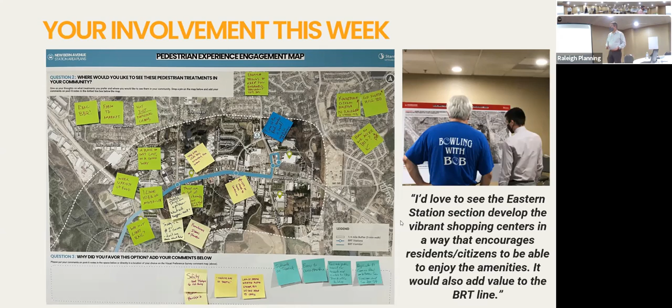One, and this was kind of one of our favorites: we've lived in this neighborhood for 16 years. Our son is 17 years old and will be heading to college soon. We sometimes talk about moving once we become empty nesters, but now I think we'll stick around a little longer and see what happens. This is exciting. And as we talk about that, it is exciting.

We take all of these comments, these ideas, these voices, and we build it into a vision. Again, you'll see an emerging vision statement, a draft vision statement. This can and will change the more information the community tells us. But there's another piece I do want to read because it's important: our neighborhoods are safe, welcoming, and walkable.

Our retail centers represent local business with a wide variety of goods and services. New multi-use paths connect us to shopping and to the rich regional network of greenways already weaving through our neighborhoods. Most importantly, our community evolves in a way that maintains affordability for existing residents, offers expanded housing choices for future residents, and prioritizes safety and security at all levels.

So we begin to bring that down into very specific goals. And these are our core goals. Number one, improved safety will guide decisions at all levels. Our streets are for people, not just cars. Aging and vacant commercial areas redevelop into mixed-use centers that offer the opportunity to park once and then walk to the variety of shops, services, entertainment, and park-like amenities.

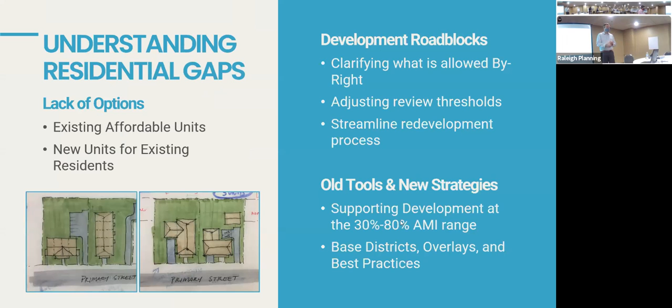At the same time, we want to support our local businesses. That's another strong message we've been hearing. And I can say for certain in this area, the local businesses, the retail, the restaurants, people have said, we want those. And that became actually a core tenet of this week, how do we kind of come up with some ideas that protect those, support them, and help them become part of the future. You'll hear about that shortly.

But we want to make sure that we have all of these in place, and really, how do we build and create support? So it's all of these different toolkits that we go through and work to have some resources to community builders, nonprofits, and the local banks. And again, the businesses and the people are often connected because they live here, their businesses are here, and we want to make sure that all of this comes and grows with this plan and this effort. So now we're talking about how do we take all of the information we're hearing, all that we're learning, and the ideas and the potential opportunities within this area.

And with this, I'd like to introduce Rhonda, who's going to talk a bit about the green spaces and others, and then getting into some of the opportunity sites that we've been looking at that you all will very likely recognize.

The green spaces. When we say green spaces, we can mean a wide variety of things. We can be in small neighborhood parks, pocket parks, large regional parks. They can be parks where you sit and read a book. They can be parks where you play soccer, football, or what have you. These can be greenways that connect you to natural resources like stream corridors. And we all know that we've always loved parks and being outdoors, but one of the really big lessons of the pandemic is we really, really love being outdoors.

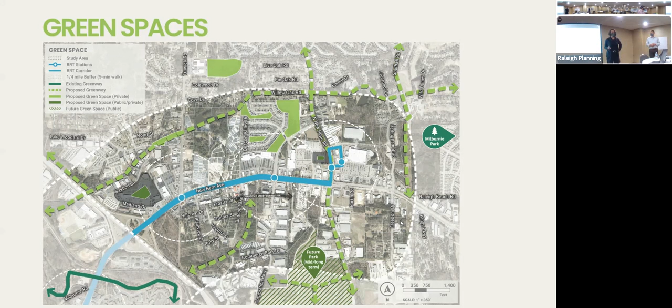So as we look at recommendations for the Eastern Stations, instead of looking for new parks—although there is potential for a future park down here as this landfill moves on to its next stage of life—what we're really looking to do is make these greenways, future and existing, more accessible by making the connections we need into the neighborhoods.

Examples of those greenways: we've got the Crabtree Creek Greenway, that was the one on the left side of the screen, and the Neuse River Trail Greenway, just off the right side of the screen, and Milburnie Park. When we talk about making those neighborhood connections to the regional scale, these are examples of linear parks—mixed use paths or shared use paths just off the side of the roadway. The idea is to make them more than just a sidewalk, to make them a little bit greener, a little bit more luxuriously recreational to use.

Putting it together, now we look at opportunity sites—patterns in the neighborhood of what we have and where we might see opportunities. We looked at this in layers. The first layer, shown here in orange, are projects that are either already in progress or have formal plans submitted to the city. These are changes you're going to see coming to the neighborhood.

Over here, this is going to be just under 200 new residential units right by the Beltline. We've got a small bit of additional retail coming in here on a previously vacant site. Many of you are probably familiar with the Amazon Fulfillment Center that's just about completed down here.

And then the Raleigh Beach Road—entirely residential development over here. There is an easement running through the middle of it, that's Duke Energy, and another new greenway is slated to go through that, according to the draft greenway plan that's up for public comment right now.

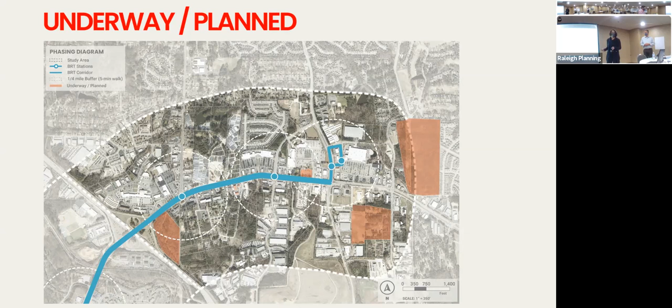So this is interesting in that we see residential approaching Hedingham right here, and we'll talk about that more later. So these are underway and planned.

Infill opportunities—the first level of infill opportunities that we're seeing is down here. This is a very low density, mostly single family residential area, pretty heavily wooded. Some of the roads in there are actually dirt. We see this as an opportunity to change the zoning so that it allows more density.

We call this an infill opportunity at the current homeowner's discretion. So if they choose to build at a higher density, or if somebody buys properties in there, multifamily will be an option. But if current homeowners are perfectly happy with where they are, their property value will likely increase as a result of that upzoning, but they are perfectly capable of staying there without any change.

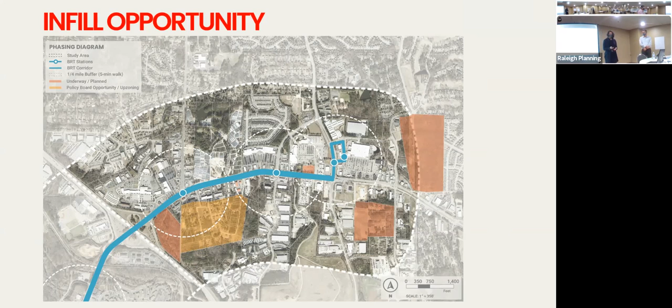Our second level of opportunities is what we're calling near term, and we don't have a specific time frame associated with this because, as always, this is fairly market driven. We have the Tower Marketplace site over here, a vacant mall, and this is interesting because we've identified three sites that represent three different scales of development.

So this is the Tower Marketplace, vacant, on the west side of the eastern station areas. Then there is Wilder's Grove, a little bit smaller, right on New Hope Road. And then this one I'm calling the Hedingham Opportunity Site.

We have a little bit more explanation on each of those. The first is Tower Marketplace—as you're all familiar with, a traditional interior-focused mall. There still is that cafeteria in the back that's functioning, but the rest of the mall is vacant.

This is the largest site that we're identifying to demonstrate one scale of development—about 14 acres. This is probably what we would call a master development opportunity, where different parcels may be sold or developed under the design guidance of a single developer, but by different entities. Because of the large size of the site, we have opportunity for a pretty varied mix of uses.

So they're all the same color, but we have some office here and here. And then we have what we would call residential mixed use—a kind of town center, a main street with amenities and a public park and plaza space in the middle. So we'd see retail and restaurants and shops along this main spine with residential condominiums and apartments above it.

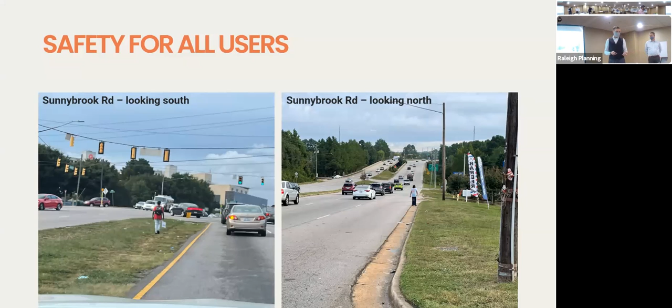Okay, so let's talk about pedestrians first, because that is the critically most important thing. Let's begin at the system level.

We're starting very broad. Some of these lines we've already spoken about - whether it's a shared use path connection, whether it's some internal streets where we can have enhanced sidewalk connections, or some of those very large, high quality intersections shown in orange, trying to get you across New Bern Avenue safely.

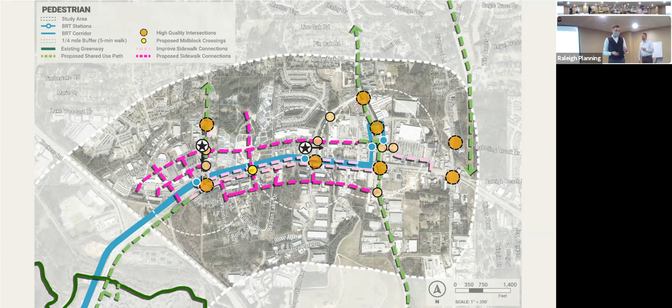We're going to show some specific examples - the two stars shown there, one of which is on Trawick and the other one is over by Beacon Plaza.

Beginning with Beacon Plaza - this is looking at Corporation Parkway, however you're in the shopping center looking out.

Right now, there is absolutely no pedestrian amenities to get you to, through, or across safely. As an anecdote, to the left of this image, there is an existing bus stop, where people are getting on and off the bus, coming into the shopping center and going back out unsafely. So this is the existing conditions.

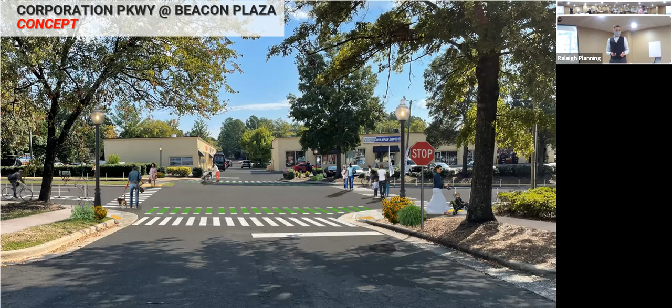What we would envision is much more multimodal. Corporation Parkway, as it stands right now, is 5 lanes wide. However, it only has the number of vehicles that will support maybe only 3 lanes, so we have 2 lanes to deal with in a road diet condition. That means we have the opportunity for separated bicycle lanes on each side, and near the intersections, a pedestrian refuge island to safely get you across this once very wide roadway, but now right-sized for its current condition, speed, and use.

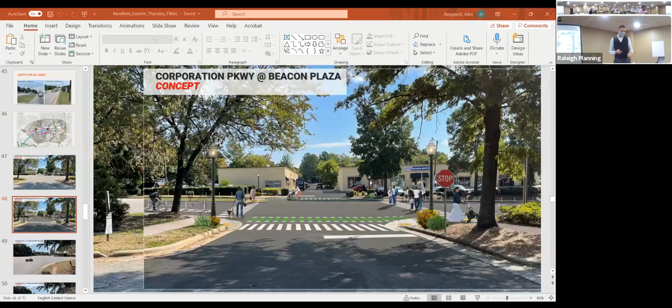That's the concept. Moving on a little further west to Trawick at Tower Marketplace. The existing conditions showcase that right now this corridor is being used by pedestrians. This worn path extends more than a quarter mile to the north, maybe even further, because people are walking to the shopping center and back home again.

Again, there is currently no pedestrian amenities to get you across this driveway or across Trawick. As you can see in the very foreground, New Bern Avenue runs east-west further on down the slope. So right now, the conditions for pedestrians are unsafe and just sort of lacking.

What we would hope for as a concept is to extend the sidewalk further north, to have an additional sidewalk into the shopping center, because that's what we're trying to connect to, but much more pedestrian friendly to get you across the driveway. And as you're crossing Trawick, one of the most dangerous roadways in our corridor, a pedestrian refuge island, so you only have to cross one segment, wait, and then cross the other segment.

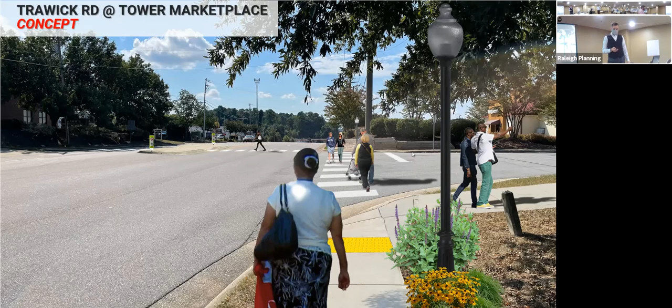So strategies and concepts moving forward from a pedestrian perspective, those are just 2 examples.

Now, shifting to roadways in the vehicle mode in particular, we just want to stop and acknowledge that not all streets are the same. There's many varieties. So when we show an example, sometimes it's one of the boulevards or major corridors, and sometimes it's more of a neighborhood street or a complete street. There's a lot of different flavor to go with, whether there's higher speeds or higher volumes, and a lot of potential opportunities in between these different varieties of roads and streets.

Now, the first example we have for you is that intersection of Trawick and New Bern. We just showed it kind of down the slope in the last photo. Right now, currently, there are 3 pedestrian crossings. So depending on which way you're coming, you might need to cross the intersection in the south and then cross New Bern Avenue to the north, and then come back to the west side again. So essentially you're crossing 3 different segments to only cross the roadway 1 time.

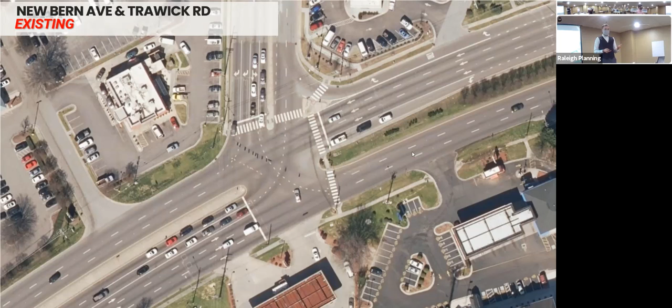So this is the existing conditions. There is a pedestrian refuge island in the middle where you can stop and wait. We consider this adequate pedestrian improvements, but there's a lot more that can be done to make this much safer for pedestrians and make sure we're not causing any excessive delay for the vehicle mode.

So number 1, there's a lot going on in this graphic, but we can add that additional leg on the western side. So if you are coming from the west, you don't have to cross 3 segments, you only have to cross 1. There's an additional pedestrian refuge island on the western side where you can stop and wait before proceeding on.

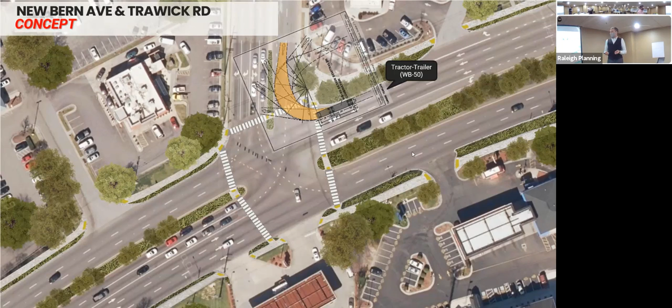And more importantly, the free-flowing right turn lane that exists right now, which essentially allows trucks and delivery vehicles to speed up as they go around this curve, is something we want to fill in. We want to make sure that the curb is still adequate for large turning vehicles, so we put on a tractor trailer vehicle and show that it can still make that turn from the middle of one of the existing travel lanes and make that turn before heading north onto Trawick, without conflicting with the new pedestrian refuge island to the north as well.

So we're drawing in the curve to make it easier for pedestrians, making a shorter distance to cross, while still allowing that turning vehicle and the largest vehicle in this corridor necessary. Just highlighting some of the additional amenities there as well. There would also be the ADA curb ramps for pedestrians at each corner, the pedestrian refuge islands on both sides, and high visibility crosswalks. And with this added landscape, possibly some shade trees as well.

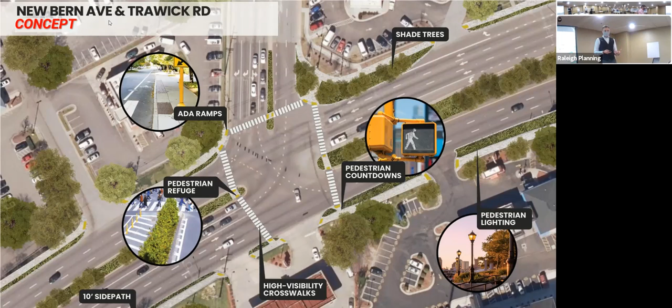Okay, so one more concept design there. Further on down the corridor on New Bern Avenue, there's the potential for a mid-block crossing option between the signalized intersections. There are a variety of mid-block crossing treatments, and there are engineering protocols to decide what's the most appropriate option to choose from. I've only highlighted two here.

The top image is what's called a Danish crossing, where you cross half, turn your body physically towards traffic, and wait until it's safe to then cross the other half. It's much like a pedestrian refuge island, just split in the middle to give you time and pause to wait. The bottom is actually a rectangular rapid flashing beacon, where when you activate these and the lights go back and forth, vehicles are supposed to stop at a non-signalized intersection at a mid-block crossing location. So there's at least two options for a mid-block crossing along New Bern Avenue and other roadways in this section of the corridor. But these are just two we wanted to present as potential opportunities.

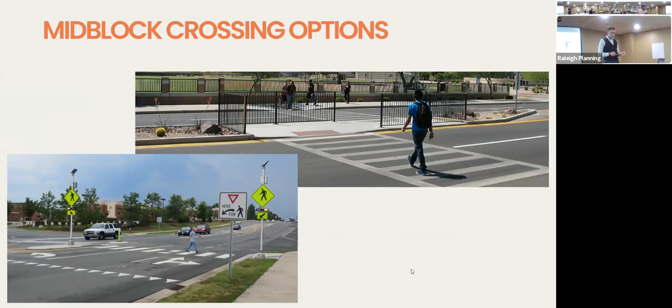Now, shifting to the bicycle amenities, because we are walking and biking more since the pandemic. There are a lot of planned bicycle connections to be made, some of which would also be for pedestrians, to connect you to those regional greenway systems, where they would be enhanced side paths along the side of a road, because we have those opportunities since there's adequate right-of-way. So the major green lines are those important or more significant bicycle connections. Some of the blue bike lanes, or separated bicycle lanes, are some of the bike-specific, traditional amenities that aren't really for pedestrians. And then of course, crossing at those high-quality intersections.

Just like pedestrians, bicyclists need those safe places to cross at New Bern Avenue. We want to show you one example along New Hope Road up here to the north, and remind you that this was one of those development sites that Rhonda talked about near the BRT station a little further south. So this would feed right into it in the near future.

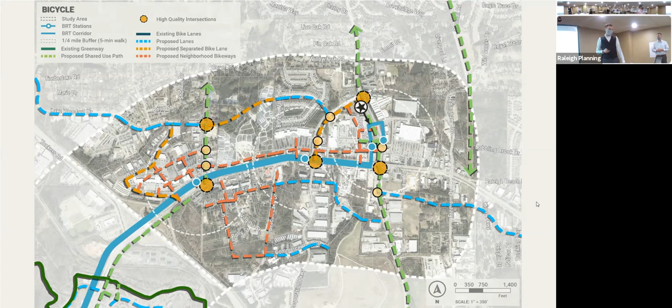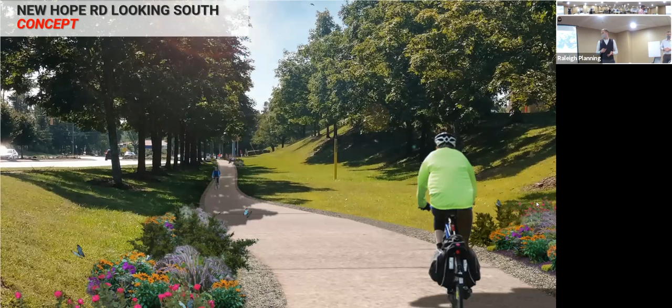So this is what the right-of-way looks like right now. It's just off New Hope Road. Right now, a portion of it is being used for storm drainage and runoff, but we can still utilize this area already. So maybe it'd be a curvilinear side path. It's much more of a bicycle and pedestrian amenity focused, but leads you from the north down south towards the BRT station, and hopefully into that development site in the near-term future. So you have a nice separated and safe connection to get onto that regional connection to regional greenways.

So one concept there. Much further west, we want to talk about the challenge of getting over and around the 440 Beltline ramps. We've come up with the most logical and shortest opportunity: to utilize a portion of the outside lane of travel, making sure we can get around existing ramps and maybe redesign some of their geometry to make them safer for pedestrians, while not disrupting the vehicular flow as well.

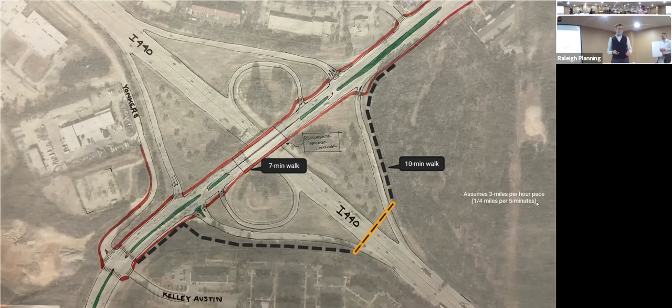Just want to highlight that there's a second alternative that we explored as well. It is to take you away from New Bern Avenue, across and over on a bridge, much like the one over at Wade Avenue, and then bring you back. This alternative would be much more expensive, and would add at least 3 minutes to your walk time from point to point. So this is an example of what that would look like on the south side of New Bern Avenue.

Right now, there's 4 lanes plus a shoulder, 54 feet of pavement. However, if we can make sure the free-flowing ramps align properly and still get traffic flow, I'm hoping we can utilize one of those lanes for a 2-way separated bicycle and pedestrian lane. One example would have flex post bollards as separation and then pedestrian scale lighting. The other would be much more of a traditional safety enhancement using concrete barriers. Higher level of safety, and perhaps there's an opportunity to use public art on the inside, making them a bit more fun and entertaining to actually use this corridor. So concepts A and B.

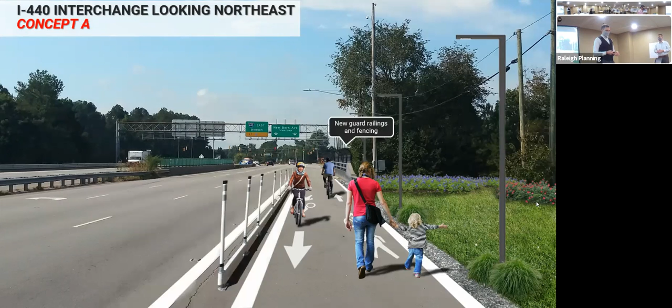Rhonda did a wonderful job showcasing some of those development sites and potential opportunities. We want to recognize that land use and transportation are directly related. Remembering back to the phasing in the near term, midterm, and long term, all those development sites are shown here. We want to make sure that regardless of when that phasing happens, they still meet some of those mobility opportunities.

We're layering them all together in the near, mid, and long term, so that not only are people redeveloping these sites and moving to this area, but capitalizing on the mobility resources here and connecting to potential future greenways to the north, over the Neuse River Greenway, or along New Hope Road with the side path concept we showed. So stitching it all together, laying it on top of one another, making sure the system and these strategies will work for you.

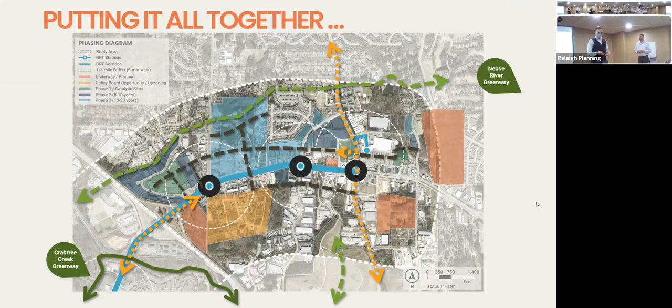Thank you, Timothy. We've just shown you all of these ideas, potential opportunities, a vision that is growing and will continue to grow as we work through this. The next question is, what does this mean? What is the plan actually going to be, and what's going to be in it? What will the city be doing to help make this change happen?

The plan itself becomes the mechanism, and it will make recommendations so we can get the right tools and policy in place. So right now, these are the steps. This is how we set the stage and can move forward into implementation.

It's a land use and zoning amendment. This means increasing the density, increasing the heights, creating systems that favor and encourage affordable housing. Significant redevelopment is anticipated in selected nodes along the corridor, and we're identifying the best places where that can really work and be transformative and supportive, places to go to. It's looking at this nodal, smaller area development concept.

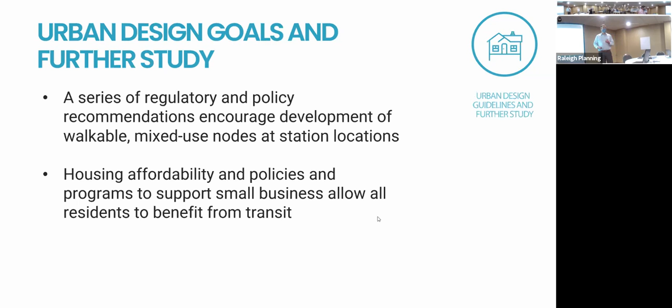So what are the next steps as we wrap up the end of this presentation? We've got October 4th to the 8th, the New Bern Eastern Station workshops. We were just wrapping those up right now.

We're doing a bike and pedestrian safety summit. That will be on October 15th. And then in the winter of 2022, we are pulling this plan together. The drafts will be emerging, and you'll be able to see it.

At every step of the way, we look for, we encourage, and we really want to bring the community's comments and input into this. Because again, you're here, this is your area, your vision, and your plan, and we need to make sure that as this area changes, the community is at the table and participating in that change and helping it make the change that we all are looking for.

So with that, let me just put a final plug. If you Google Raleigh New Bern Area Plan, station area plan, you'll find it, or go to Raleigh's government website and you can easily find it from there. So please come, all this information will be online. There's multiple ways to provide us input and comments through the website. And again, we really encourage that. The more that we hear from you, the more the vision is coming from your voices.

I'm about to open up for questions, and what I will say to our new guests who have arrived, after the questions, I'm going to give you a personalized speed version of this presentation so you can see exactly what we just went through.

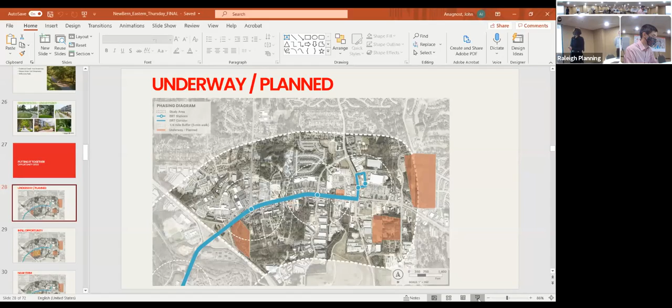Thanks. So for folks that just arrived or for folks that just joined online, I'm Rhonda. And as part of our look at the community and what's here, what may be needed in the future, and what might evolve in the future, we did identify 3 of what we'll call opportunity sites.

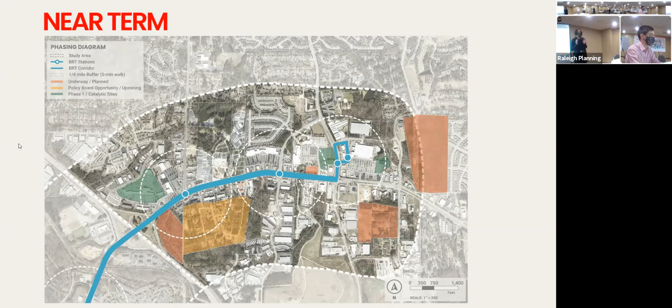Big view on this map, we've got the Tower Marketplace over here on the west end of the alignment, and then Wilder's Grove, also another mall site that's underutilized right now, and then what we're calling the Pettingham site here right next to the Walmart. We're really excited because the interesting thing about these 3 sites is that they kind of showcase a large, medium, and small version of redevelopment.

Starting with the large one, that would be the Tower Marketplace over there near the Beltline, and this is about a 14-acre site. So this site gives us the most opportunity to get a lot of different land uses in there. We're talking about a mix of a little bit of office, some retail, and then probably both for rent and for ownership residential, with a variety in that residential as well.

So we're thinking we've got office on both ends of the development, and we've got a central spine, sort of a pedestrian promenade, going through the center of the development with public open space and plaza, likely all those outdoor restaurants that we've really grown to love during the pandemic. And then residential, lease and condos and apartments above that retail, those shops and restaurants in the center of the development. And then back here, townhouses and smaller ownership products, so that we're offering a variety, both probably studio, 1-bedroom, 2-bedroom, and then a more vertically stacked use.

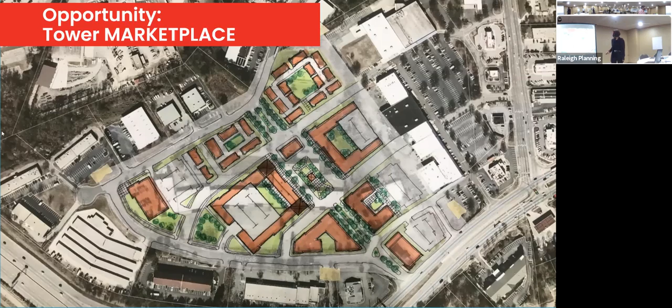And this is just some examples of what that town center, when I said we've got that central pedestrian spine with some amenities in the outdoor restaurants and shops, these are just some examples of what that might look like.

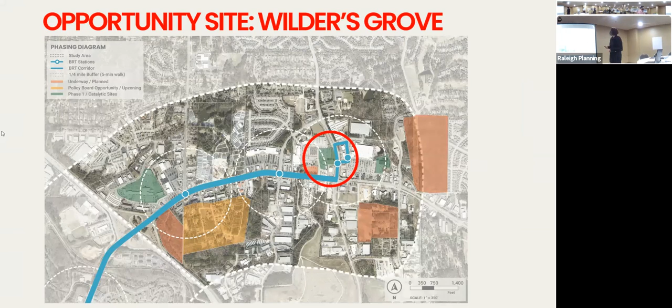Moving on to our medium site, this is the Wilders Grove Shopping Center. Those of you who are familiar with us, there is a grocery store here now. You might go here to buy your new furniture, sofas, couches, what have you. Or if your license expired, you might take advantage of the DMV up here.

So this is a smaller site, but we're really excited about it because it's sitting right on the last of the BRT stations. The BRT will come down New Bern Avenue, turn up on New Hope Road, loop around the median development by the Walmart, and then head back to downtown Raleigh - this will be the station. So this is a site where we really want to take advantage of the density bonuses available in the TOD overlay district.

That means we can go a little higher than we normally could as long as we include affordable housing. This is really exciting because we can get more people living right on top of this new transit investment. We're also careful to make sure we include some green space in this development - in this case, a linear park or linear green space.

We previously said this would be kind of a phase one development - you'd probably see one building go up first and then the second. But in the future, if land becomes more valuable and this becomes an attractive option, you might see the rest or pieces of this mall also redevelop, and we'd be looking to take this green spine and connect it the whole way.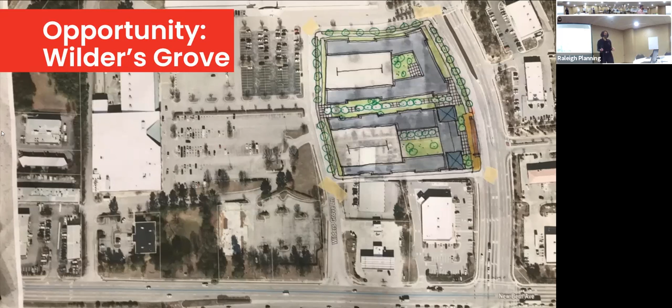To be clear, that's pedestrians only, so we get our own space instead of sharing it with cars in this particular instance. Just to help you imagine it, we're calling it a BRT Village - this is a little bit what that might look like.

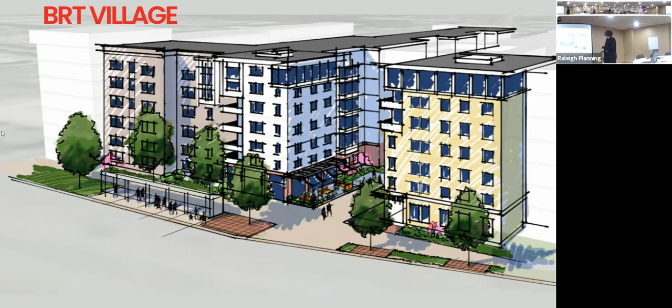So we're standing across the street, maybe actually in the median, looking at that new BRT station, which tends to be a little bigger and more robust architecturally than your traditional bus stop. You could slip right down in here, maybe grab a cup of coffee while you wait for the bus, and then if the coffee takes too long, you'd have to run and catch the bus, as we always do. Then your green spine would connect you back to the rest of the development as that happens.

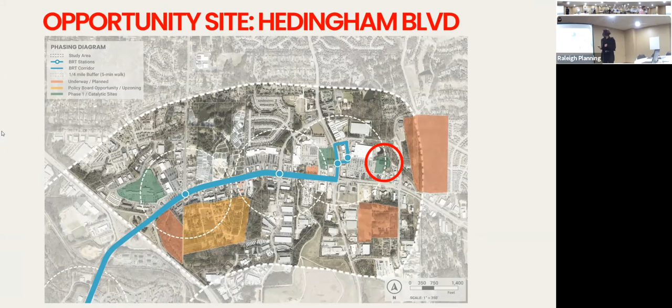And then finally, this is our small site, Hedingham. You know, Walmarts and big format stores like that always have really big surface parking lots that might be full the day before Christmas, but generally have some space. So we're looking at that and saying, how can this maybe work for the community a little better? We're looking at a small project, single building, and we kind of calculated this out.

It's smaller, so we wouldn't be building a parking structure - we'd be parking those in the surface behind. So likely looking at maybe 5 stories of apartments over 1 story of retail. And that retail would actually get pretty good exposure, both to New Bern Avenue out here and to all the folks parking in the Walmart parking lot.

We're thinking that the folks who live here would appreciate a slightly more green connection over to the BRT that's on New Hope Road over here. And then they've got all of these restaurants here, anything they can want to purchase at Walmart.

This location is also really exciting to us because it takes advantage of the energy of the Raleigh Beach Road residential that's coming online over here. It also gives the folks who would live here the opportunity to come out on this new road. This part of the road is already dedicated but not built, but there is an easement here for Duke Energy that's also planned in Raleigh's Greenway plan to be a new greenway, connecting to the regional greenways.

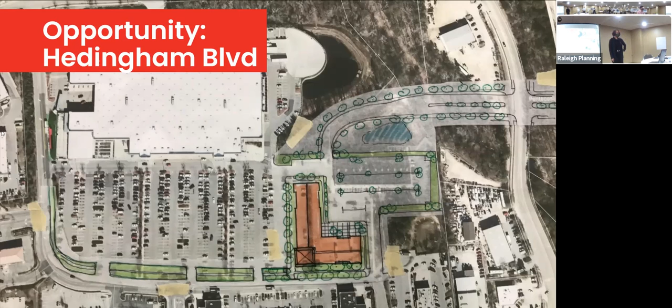So this would be a fantastic location. You've got restaurants, you've got goods and services, you've got transit, and you can walk right across here or bike and connect to the whole regional transit system. So, pretty exciting opportunity.

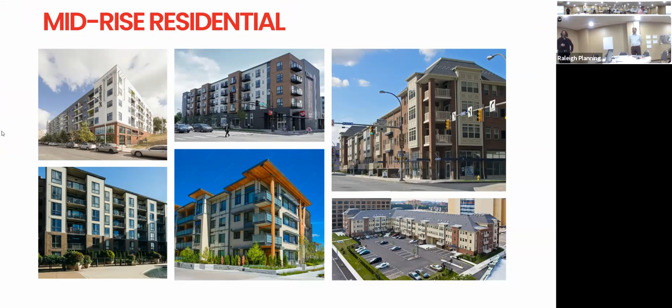Is that the part that you want to go through again? Great, thank you so much, Rhonda.